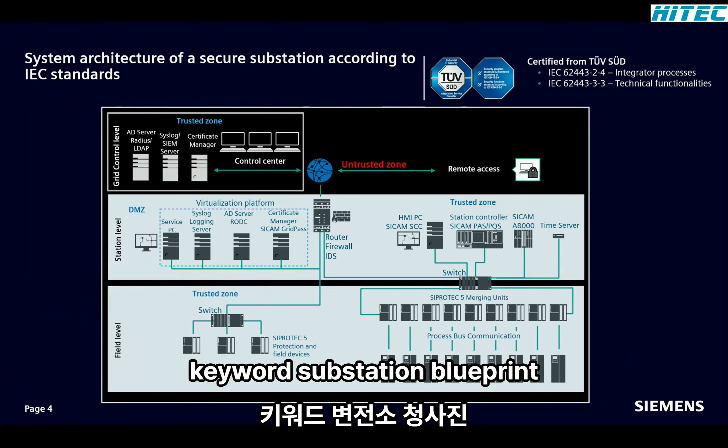From a cybersecurity point of view, SICAM A8000 remote terminal units are an integral part of a secure substation. Maybe you already heard about the secure substation blueprint. At Siemens, we focus on cybersecurity standard IEC 62443 as the security standard for any kind of automation and protection systems. Accordingly, we validated with TÜV Süd a best practice architecture for substation automation.

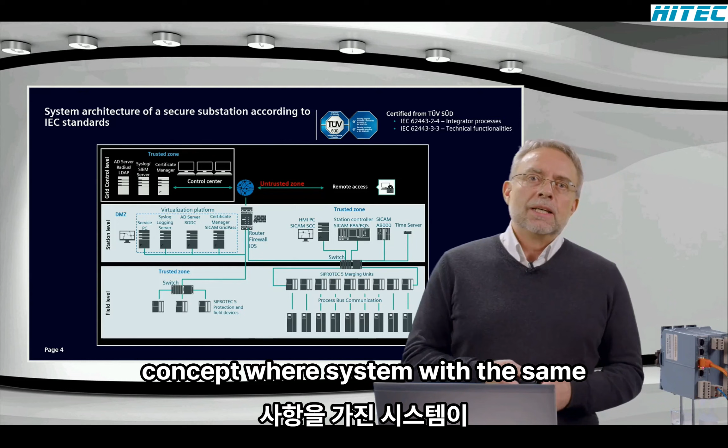This includes aspects such as network segmentation, access control, and account management, logging, and others. The architecture is based on a zoning concept where systems with the same security requirements are grouped into a so-called zone: the trusted zone with highest requirements for automation and protection functionality.

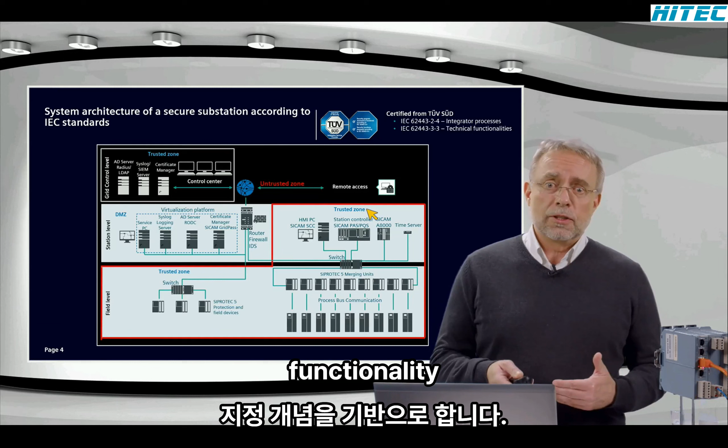Then the DMZ, demilitarized zone, for management functionalities. Here we have the service PC and servers such as syslog, domain controller, SICAM GridPass, our certificate manager. The untrusted zone is the communication network outside the substation. All inbound and outbound communication is controlled by a firewall with deep packet inspection and intrusion detection functionality.

The components and functions of a secure substation are: the SICAM SCC as a station control center and human-machine interface, in short HMI. Then we have SICAM PAS or PQS as power automation and power quality system. Then we have our SICAM A8000 as a modular device for telecontrol and automation applications.

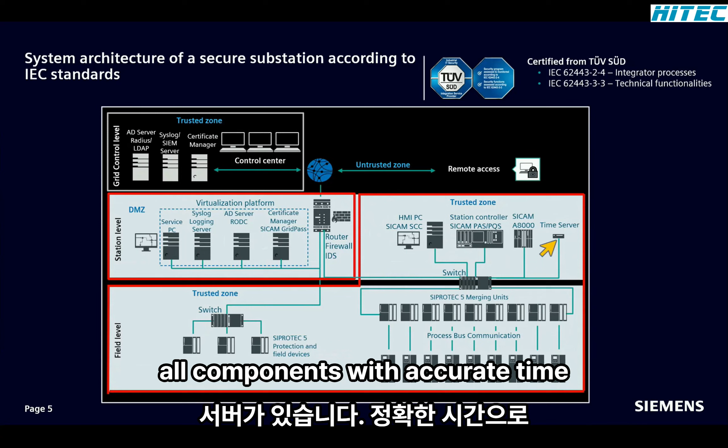Then we have our SIPROTEC 5 for protection, automation, and monitoring functions. Then we have our RuggedCom Ethernet switches for data transport within a zone, and an important time server to synchronize all components with accurate time signals. A service PC is used for substation automation, engineering, and management tasks.

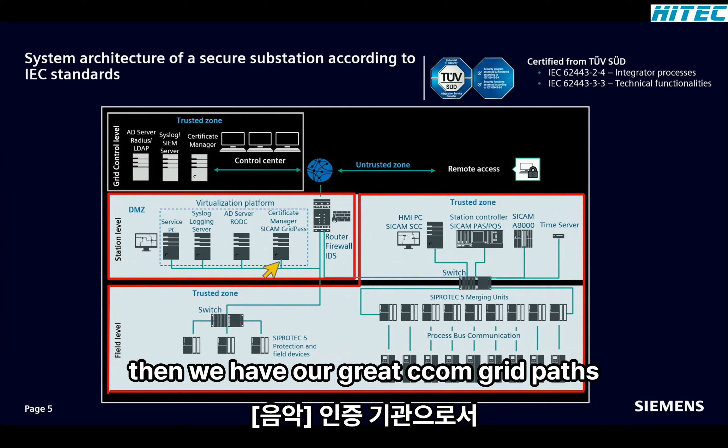Importantly, we have our syslog server for centralized logging of messages and alarms. Then we have an Active Directory server for domain user management. Then we have our great SICAM GridPass as certification authority or subordinate certification authority for certificate management. And then we have RuggedCom routers and firewalls with deep packet inspection and intrusion detection functionality.

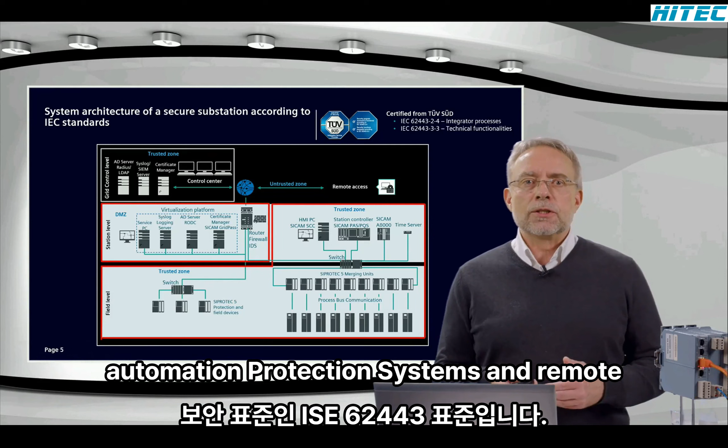Okay, from a cybersecurity point of view, remote terminal units and automation systems must be considered an integral part of a secure substation, as I mentioned already. At Siemens, we also focus on standards, and one of them is the IEC 62443 standard, the cybersecurity standard for any kind of automation, protection systems, and remote terminal units.

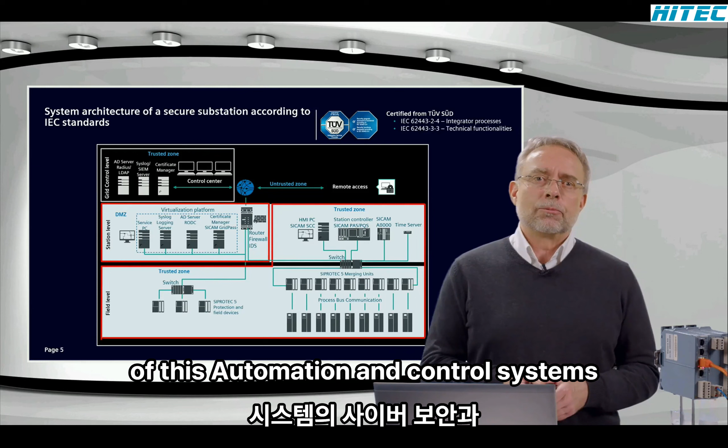According to these requirements, we validated with the TÜV a best practice architecture for substation automation. This includes aspects such as network segmentation, access control and account management, logging, and others. Today, I will cover some aspects that are specifically relevant for cybersecurity of these automation and control systems. In the end, the goal is to have measures to ensure the availability and integrity of the overall substation. That is why we will also learn for each feature the interaction with the devices.

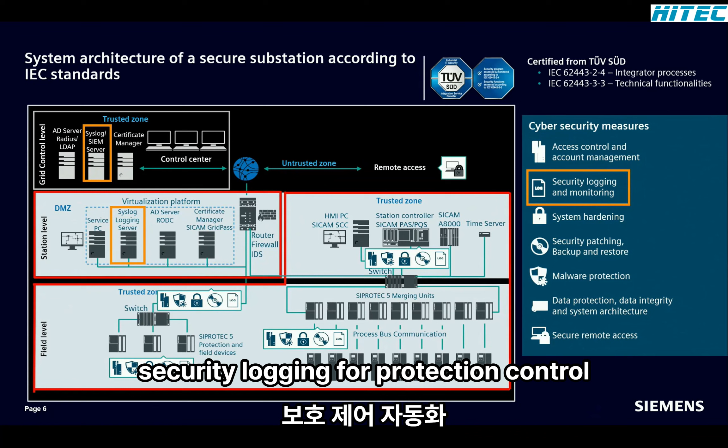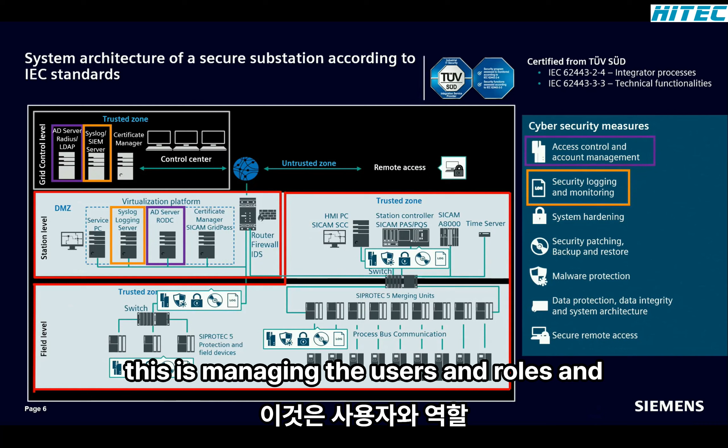So, security logging. Security logging for protection, control, automation devices, as well as communication systems will interact with the so-called syslog server and further, a security information and event management system. Then we have our access control. The remote terminal units will interact here with a so-called Active Directory, which manages the users, roles and passwords. Then we have our certificate manager. For authentication and secured communication, we need to create a so-called certificate with SICAM GridPass as a certificate manager.

Okay. Our SICAM or SIPROTEC systems have already integrated cybersecurity features. Some of these features, like firewall and software signatures, are inbuilt, but many have to be activated or filled in the system with interworking to other systems. As a first feature, our firmware is signed with a Siemens certificate, and this is a main protection feature against manipulation. Security logging needs to be enabled in the device, but it works together with a syslog server via the syslog protocol.

Role-based access control with central user management is also a feature which works in combination with an Active Directory domain controller. Secure protocols like TLS must also be seen in combination with other communication partners or server applications like SICAM GridPass providing certificates. Then we have firewall and VLAN applications where we can separate, permit, or restrict complete system traffic types. SICAM GridPass is a great piece of software which provides certificates according to standard X.509 to TLS-based applications within a complete customer network.

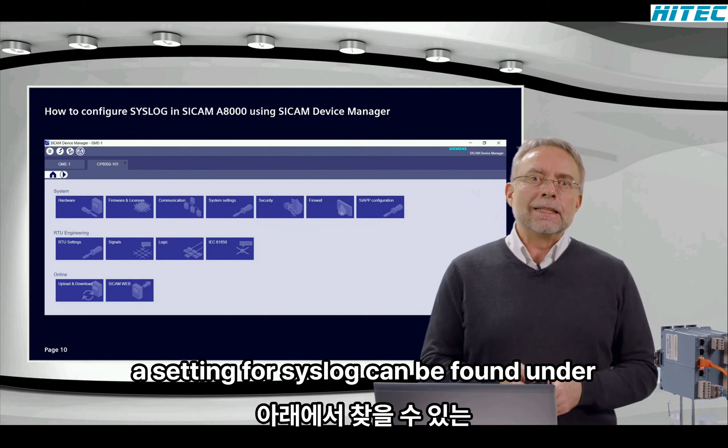So let's now look at how logging is easily activated with SICAM Device Manager. So here we enter the SICAM Device Manager. In the SICAM Device Manager dashboard, the setting for Syslog can be found under the Security button. Within Security, select Remote Security Logging to configure the Syslog client settings. Under Device, Name and Syslog prefix, select Yes to activate Syslog.

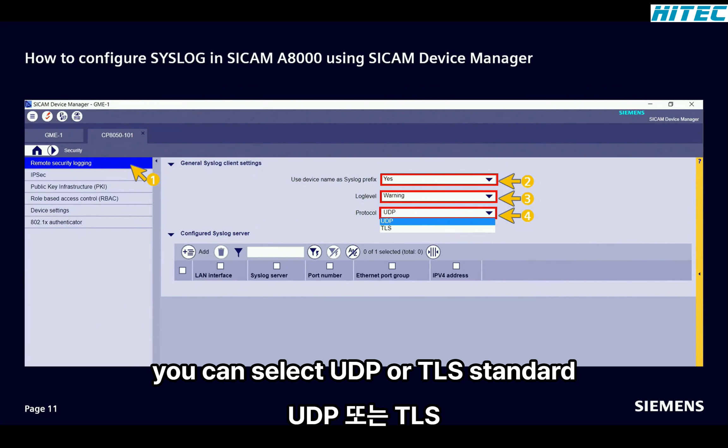Under Log Level, select your required minimum log level. The default setting here is warning, which means that warnings, alerts, and errors will be sent to a Syslog server. As protocol, you can select UDP or TLS. The standard setting here is UDP. TLS would be possible when a Syslog server supports the encryption of Syslog messages via TLS.

Under Configured Syslog Server, press the Add button to open the configuration parameters for Syslog servers. So input the settings to reach the Syslog servers, like UDP port 514, which is the Syslog default, and also the IP address and the LAN interface via which you reach the server. So now we save and we continue with the next slide. And then we can upload the configuration to the RTU.

And now we do a practical example with my colleague, François. Thank you very much. Yeah, thanks. Thanks, Georg. Thank you very much. Thank you. So I need to log in first to my PC. One moment, please.

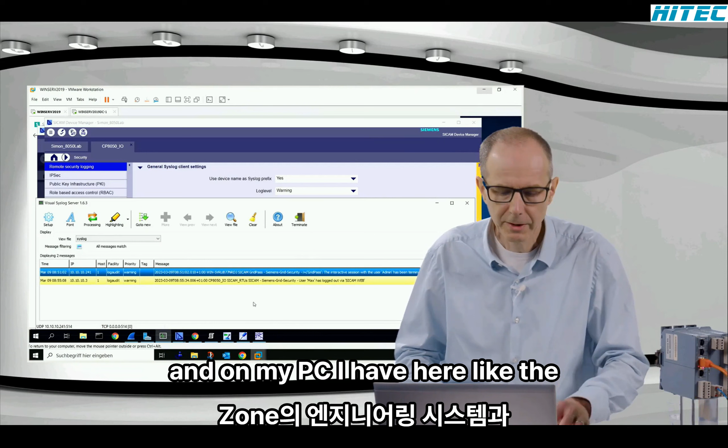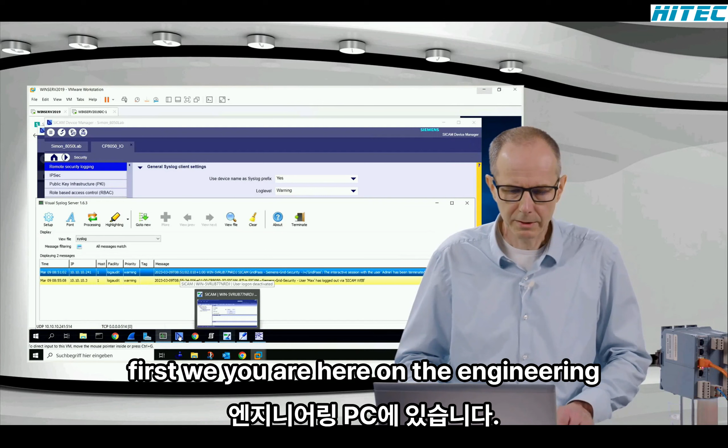And on my PC, I have the engineering system in Trusted Zone, and I'm connected to my SICAM RTU, the SICAM A8000. This model is the CP8050. It's a CPU with a power supply and some IOs. So first, we are on the engineering PC where we have our SICAM Device Manager as shown by Georg before.

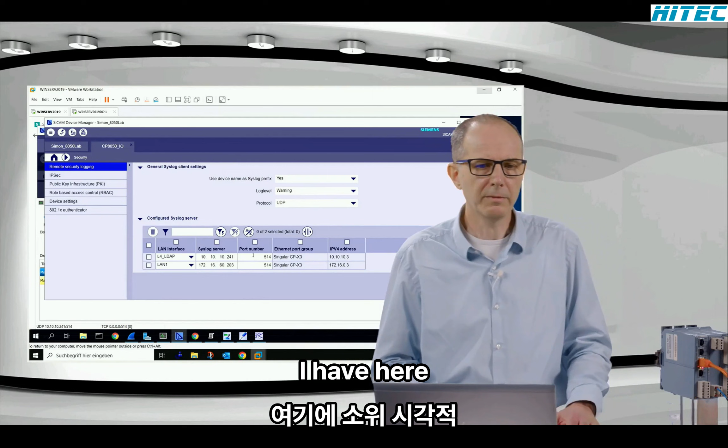The settings for syslog you will find under security, and under security the first one is remote security logging. We have already configured and loaded this to the device, to see the name of the device, to have the warnings and the alerts, and we do it via the protocol UDP. And on the same PC, on my IP241, I have a so-called visual syslog server that is running in the background, which we see here.

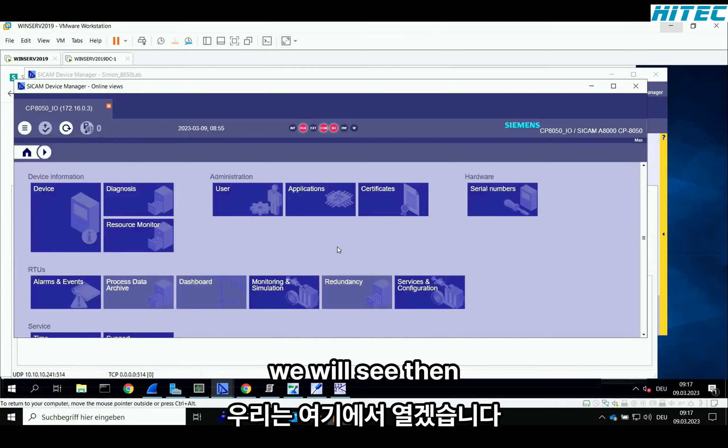So if now we log in with our SICAM Device Manager online view or the SICAM web, let me open this in parallel. Normally when I'm logging in with a user, for example, the user Max, it is already running with role-based access control, and Max has the maximum of permissions. And when I'm logged in with this user, then I will see, sorry, here, this entry, yes, exactly this one.

So the message is a warning, and with this warning, I see exactly the time of this webinar, which device, and that the remote user Max has logged in successfully with the SICAM web tool. We can also create some syslog messages when we are logging in, for example, with another user. First log off and log in again, for example with another user called engineering, Engi. So we will see that it works, and that again a user login is creating warnings.

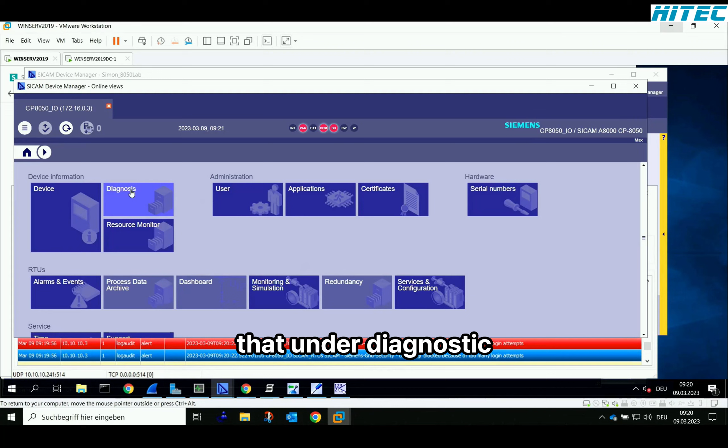What we also can see in the web UI, the SICAM web, is that under diagnostic you can also see the same syslog messages under security syslog, what is inside the device. You see that this device has also logged all these security messages. You have space for 8,000 log messages. Here's the last one we see, and you can scroll through them.

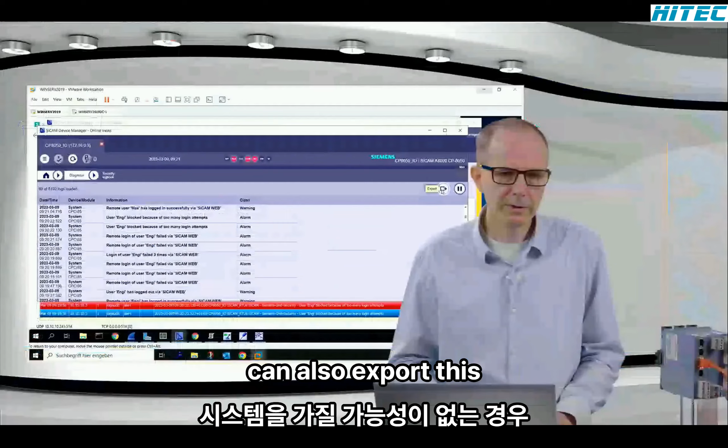This device already has 8,000 entries, and if you do not have the possibility to have a central syslog system, you can also export this information in a CSV file. And yes, so that was a short live overview of what kind of syslog messages this system sends over syslog, but also stores locally inside the device.

Okay, thanks a lot, François. Great presentation. Welcome. Thank you. Then let's move on.

So next slide, I come to the summary in just a minute.

Okay, here's a summary of syslog. The syslog is very simple to activate in our devices. It is also easy to test. Syslog is actually extremely important for cybersecurity in substations because in case of an attack, we can easily analyze quickly who, what, and when something was happening.

Typically, an attacker will work invisibly. Syslog is actually the protocol with which we can bring light to see what was happening. And this is the reason why it is highly recommended by IEC 62443. Syslog can also be encrypted via TLS, as recommended also by IEC 62351.

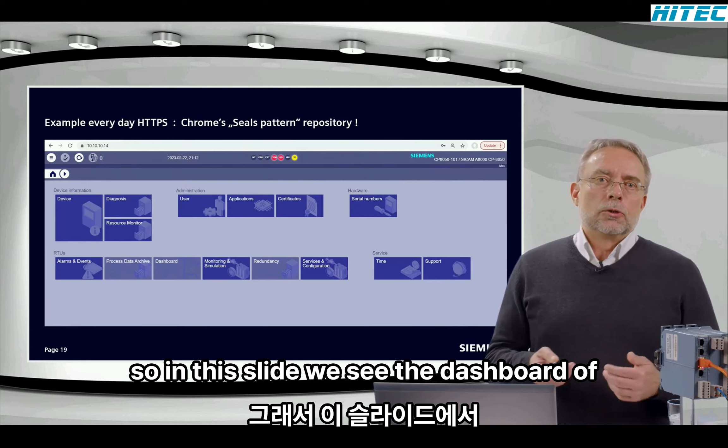So in this slide, we see the dashboard of our SICAM Web. And here, when we click on the browser URL, we can also check the SICAM A8000 certificate. It has a validity and the connection is secure. When we click on the certificate, we can display it, the issuer, and again the validity.

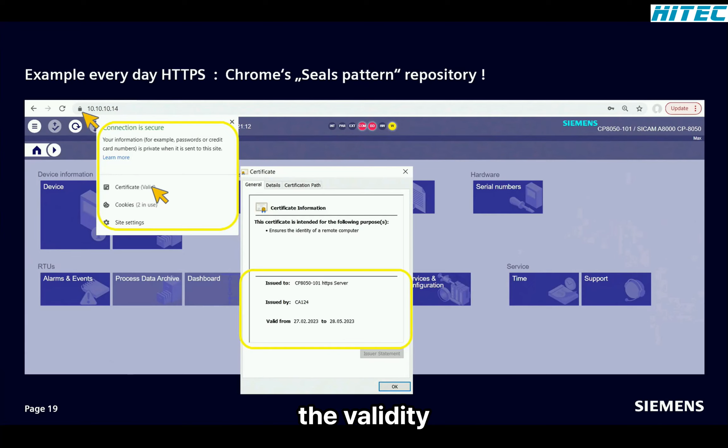So what can we do now with certificates in TLS for utility networks? And this is really a lot. A lot of TLS applications are possible with SICAM A8000 with certificates from SICAM GridPass. This webinar is for SICAM A8000, but we can do similar applications in SIPROTEC 5. Automatic certificate enrollment via secure transport: this is the EST protocol, and to thousands of A8000 devices we can transport certificates.

Secure access to SICAM A8000 via web browser is possible. Secure access to SICAM A8000 via SICAM Device Manager. Secure remote access to authenticate an engineer on site to a domain service and access the network. Secure transport of syslog messages. Secure IEC 61850 MMS data transport between SICAM A8000 and SIPROTEC 5. Secure IEC 61850 MMS or also IEC 104 or DNP3i data transport between SICAM A8000 and SICAM PAS to a control center.

I do not want to spill water on the boxes. Better not. Or just throw something down.

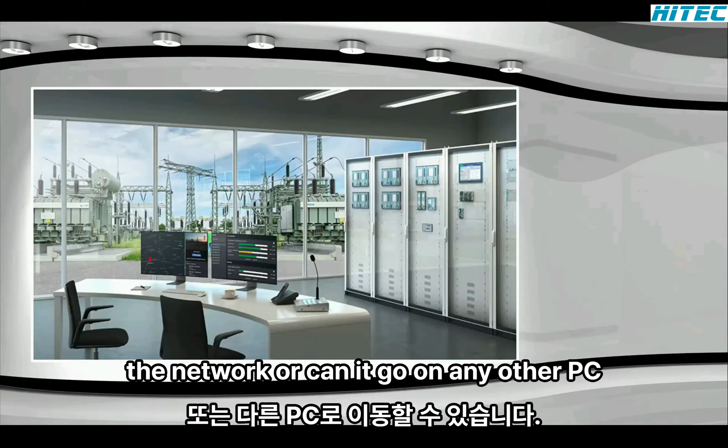No. Yeah. And the next question came in from CB. Where do I have to install the GridPass software? Do I need an extra server PC in the network, or can it go on any other PC? Yes, I mean, GridPass is actually quite a small software package. It is not too big.

You can install it on a server, a Windows Server 2019, and you can also operate it in a virtual machine. This means you do not spend the money for extra server hardware. You can run it in a virtual machine where you have an existing server. So this is what we're actually doing with our PCs also. Here, in our training labs, everything is running on a virtual machine on the basis of Windows 2019, and then you can operate it.

Okay, yeah. So I do not necessarily need extra server PC hardware, but I definitely need a server to run the software, right? Right. You need the software with Windows Server 2019 or later. Yeah, fully understood. And ST wants to know, the questions continue: Do DIGSI or SICAM PQS have support for the syslog monitoring of user activities?

Yes, you have some syslog messages, but DIGSI is running on a Windows PC, so these messages are in the Windows event message log system. So it's inside your Windows event log. Oh, okay. And these events from your Windows log, you can also send them, for example, NXLog can collect this information from your Windows event log. Collect the information and put it into a different place, like a copy then, right?

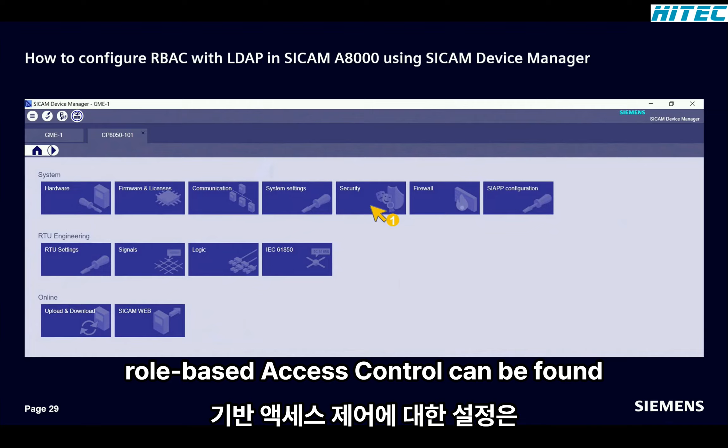Now let's start with the first step in the configuration, and therefore we enter into the SICAM Device Manager. So, slide number 29, we are here. The settings for role-based access control can be found under the Security button.

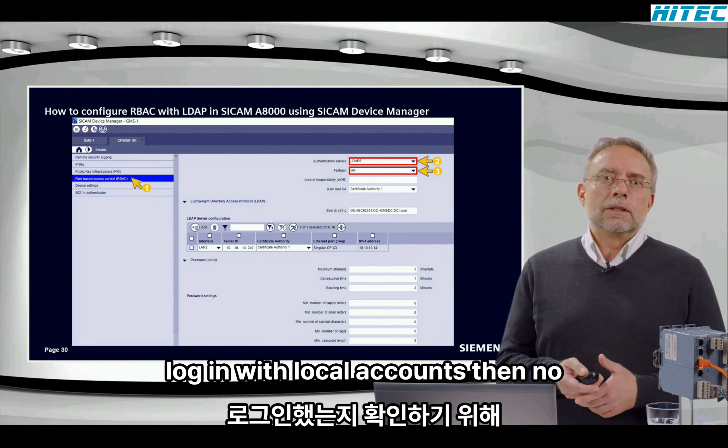Within the Security tab, we configure role-based access control. So we select role-based access control, RBAC, to get authentication service. Then we select LDAP-S as role-based access control. Then we select yes to ensure that you log in with local accounts when no Active Directory is available.

This is very important. Here we have to select a placeholder for the root certification authority. In our case, it will be Certificate Authority 1. Now we have to insert here a string of this Active Directory organizational units where the LDAP users are located. And now let's move to this location.

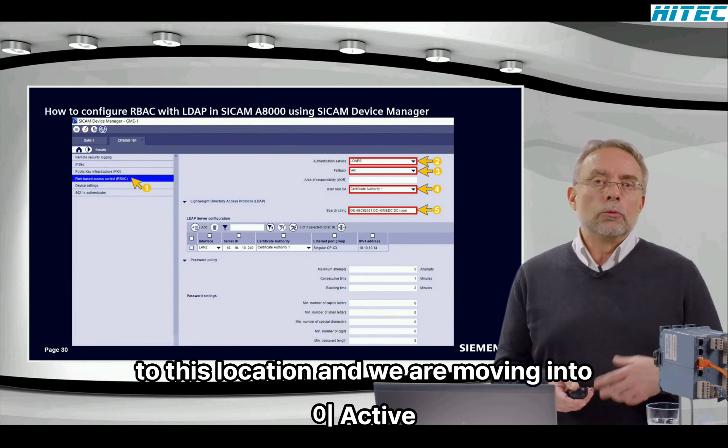So now we are back in SICAM Device Manager, and now we insert the copied string here in the settings, in the search string. Under LDAP server configuration, click on Add button to open the device configuration. The possible redundant LDAP servers can be added here if necessary.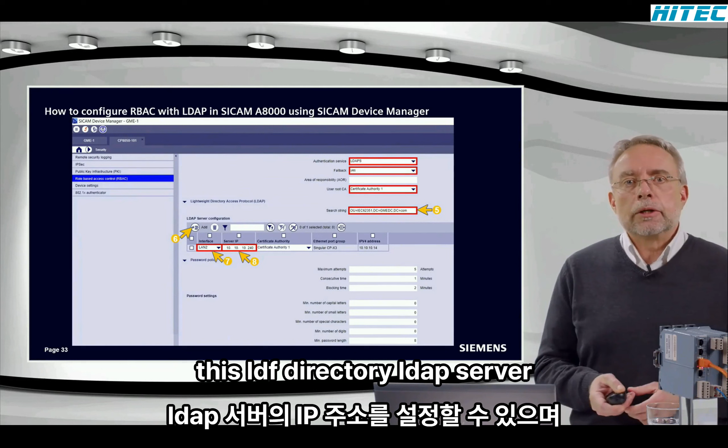So we can select now a LAN interface to reach the Active Directory. Here we can also set the IP address of this Active Directory LDAP server. And now we can select here our certificate authority.

And now we can also set here a password policy. That means the maximum attempts, consecutive time, blocking time, and so on. And you can set your password settings, let's say lengths, etc. And now we save the configuration.

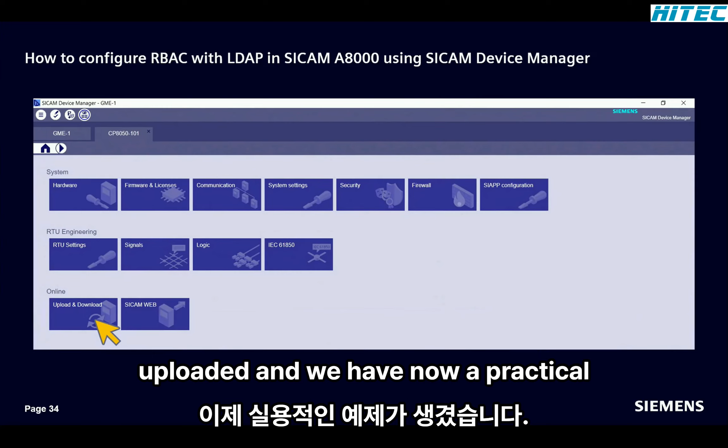So, in the main dashboard, the configuration to SICAM A8000. And now we have saved, and now we are uploaded. And we have now a practical example. This means we are finished.

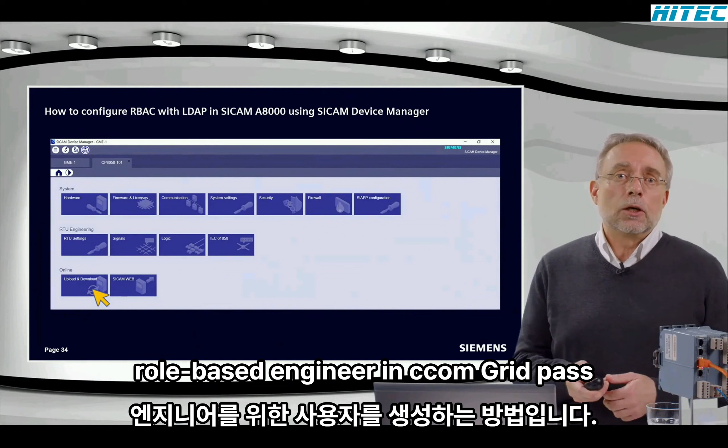And how to create now the user for role-based engineer in SICAM GridPass. This is the second step. Let's move to our certificate manager, SICAM GridPass. In the main dashboard of SICAM GridPass, we select certificates.

And now it opens the next screen. In the certificates tab, click here this Add Certificate button. Under point 1, select certificate profile. Select here certificate without extended key usage.

Then we go to the next step. Under point 2, define a certificate settings. Click here the issuing certification authority, in our case CA124. Insert here common name, engineer 01. And here you can select the country code, and let's input the remaining settings by default, and we click here next.

So in the next setup point, assign roles and area of responsibility. This is now something important. We stay here for a moment because you can see here a lot of roles, and these roles are actually according to the IEC 62351 standard, predefined in SICAM GridPass.

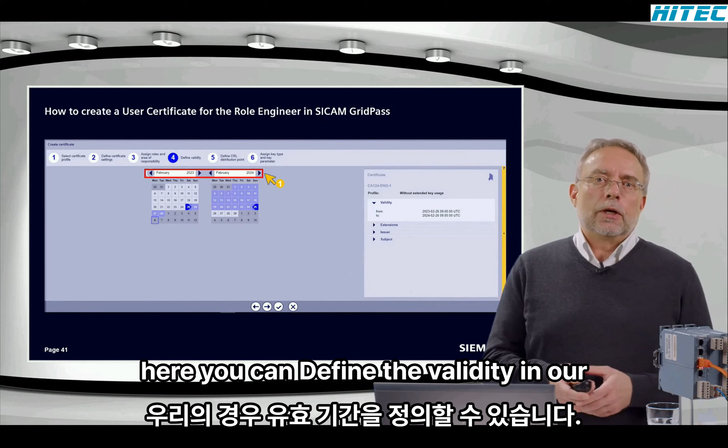Here you can define the validity. In our case, we have here 1 year, and this is okay for this example, for this client certificate. And now we go to the next step.

Okay, we are now here under point define CRL, certificate revocation list point. And here we set automatic. And then we press the plus button here, and then the brackets appear also in selected item fields. And then we move to the next setting.

And here under point 6, the assign key type and key parameters, you can set different keys, and you can select here ECC or RSA. Here in our example, we use RSA. Also you can set here different key parameters, let's say 1024, 2048, 4096, and so on. These are possible, but 2048 is fine. And we press here OK. And then actually the certificate is ready, is created.

Then we move to the next slide, and this is here under certificates. We can now download the created certificate. What we do? Select the certificate. Now we press the export certificate button. In our case now, we have to select the certificate as a DER file. And now we can export the certificate, and the certificate is downloaded and can now be found in the download directory of our Windows File Explorer.

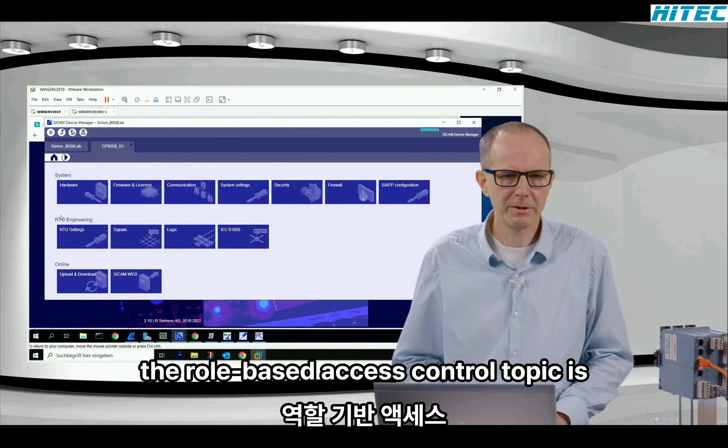So yes, as explained in the slide, the role-based access control topic is, we can find it under security. Under security, I already have here to select the role-based access control.

And here already, authentication service is LDAP-S, but Radius is also possible, for example. But here we are on LDAP-S. And as explained, we also have to set the fallback to yes, because if we do not do that, then we have problems with our LDAP server. We are not able to connect to our device.

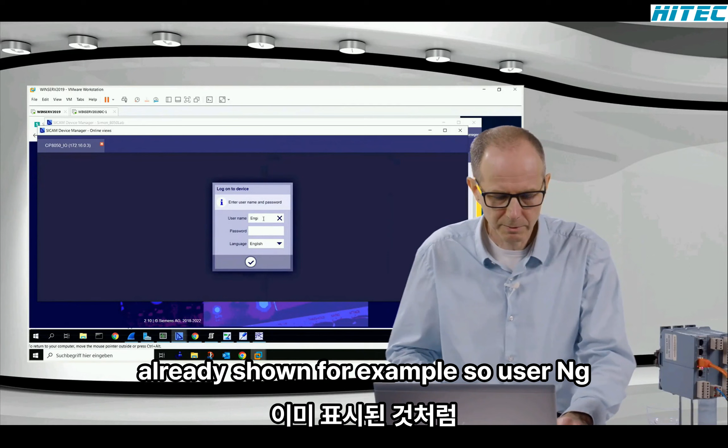And as explained, you have the user root CA, and here it's more or less the placeholder that you have in your device. So before, via the web UI, you have put here under this placeholder under the root CA, so that we can see if you go into our device via the SICAM web and connect here, like already shown, for example, the user ng that already has been configured with a role engineer.

I can navigate as engineering. I can see settings for cybersecurity, so I can look what is inside my certificate. For example, here in my device, under certificate authority, the placeholder 3 is this CA124, what is used when I receive a user certificate, but also when the LDAP-S communication is established.

So that I have created in my GridPass and loaded here to my SICAM A8000. So that was for this setting. And I also have to copy paste or write in this search string.

So remember, this search string is, in my example, I have here my LDAP server, my Active Directory server. This is here on the second virtual machine, here on the server 2019. I have to log in to this one, and there you can see.

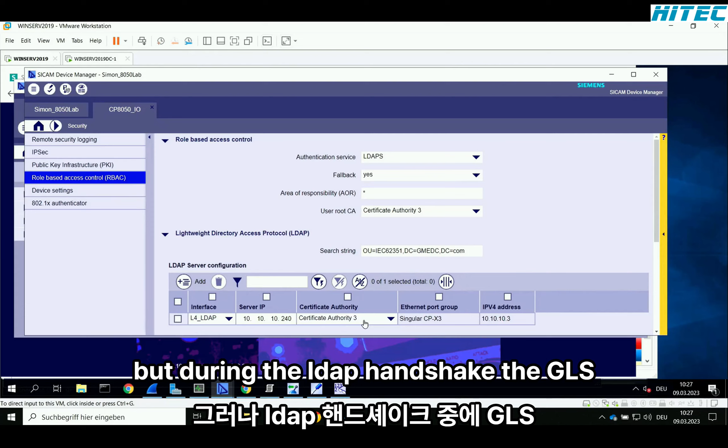And I have one LDAP server that I have added here, and the IP address of this Windows server domain controller here 240 have to set here, and during the LDAP handshake, the TLS handshake, I will check that on my domain controller, the LDAP server sends a certificate that was signed with this CA.

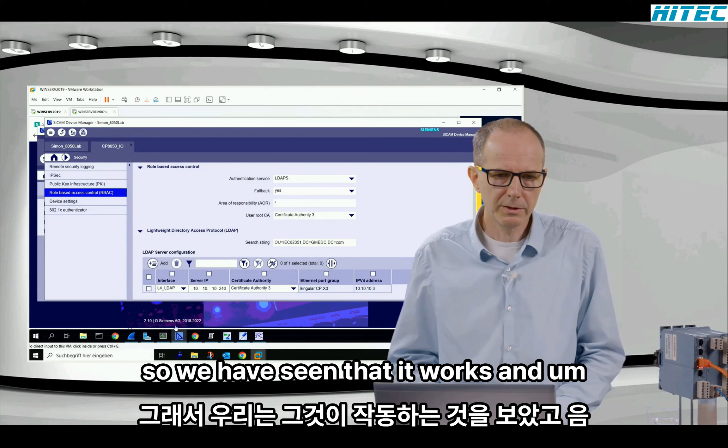Okay, so that was loaded onto the device. So we have seen that it works, and we will show again how to create a user with SICAM GridPass.

Please here, okay, here my SICAM GridPass is running, and now I will create a certificate, a user certificate for a user. As explained before, I have to click on Add Certificate and select here the type.

The type is so-called without extended key usages. And then I will be guided automatically. The issuer, what I need, is already selected, if you have done that before.

And for example, let us create a user certificate for a role security administrator, and only enter here this name. And now here, remember the important part.

You see no area of responsibility is set here under subject. So I can select the corresponding role as it is recommended in the IEC 62351-8. And for example, let us use a security administrator.

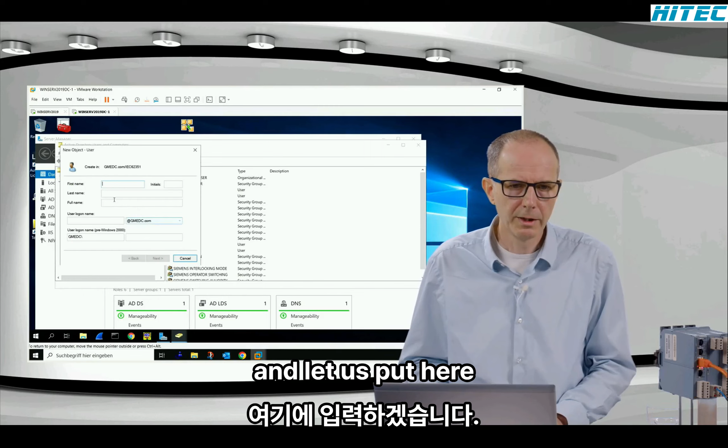This is either like that on this level. You select here new, go to user, and let us put here the SecAdmin2 as for example, and put it here also the logon name.

And in the next step, you have to enter the password for this user, so centrally, not for each device, inside each device, one time centrally here. And click on next, and now this is created.

So SecAD2 is created, but remember, now I have to attribute to them here the certificate, what you can do with here, add from file.

And here, for example, in your settings, okay, here it's a role, user role, security administrator, what you have copy paste from your SICAM GridPass, and apply.

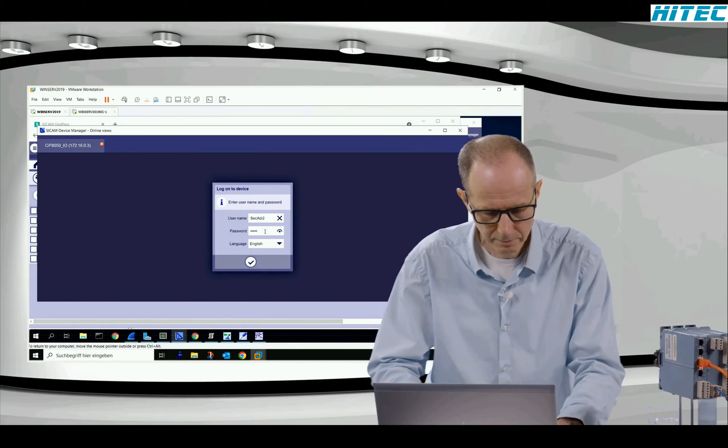The name SecAD2, with the password what is centrally managed in the domain controller. Right. Hope I do not make a mistake in my password, but normally, no, I can log in as security administrator, a new role that we have.

So, for example, under user, you can see the local user, but also here, the logged in user. I'm here, SecAd2 as username, and my role is written there. So, for example, with this role, I have not all the permissions.

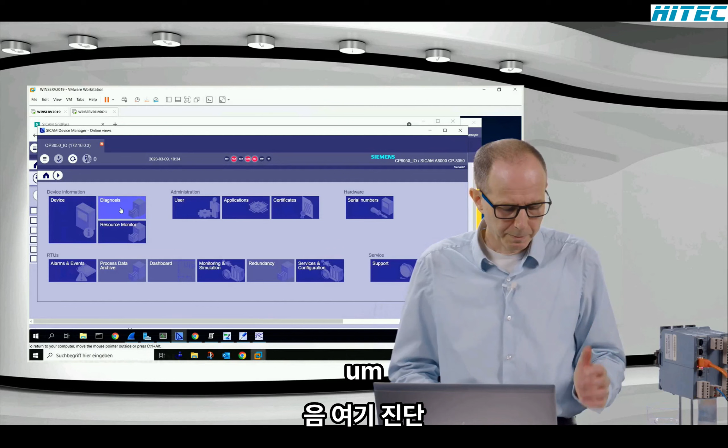For example, here, I'm not able to clear diagnostic logs.

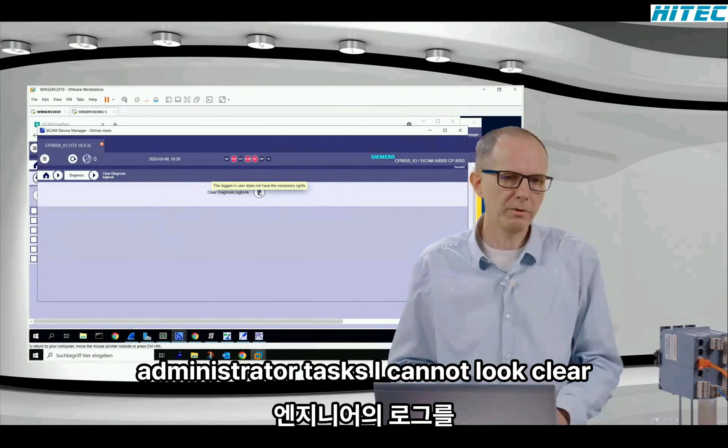So this is not possible. I do not have the permission to do that as a user who has only permission to do security administrator tasks. I cannot clear the log for the engineers. Okay. That was role-based access control in a practical way.

Okay, thanks a lot, François. Great presentation. So let's move on to the summary. Just a moment. Okay, just a moment. We are coming to page number 52, right?

Here, a summary of role-based access control with LDAP. Actually, it is possible to configure a redundant LDAP server in our SICAM A8000. Role-based access control with LDAP is a standard also for cybersecurity for substation and automation systems. So attacker access is blocked after a certain number of unsuccessful login attempts.

High availability. We have seen that fallback measures, let's say also backup servers and local users, are possible. That is why it is also recommended by IEC 62443, and IEC 62351-8 defines the protocol LDAP and the roles to improve interoperability. This means we are interoperable with other systems like Windows.

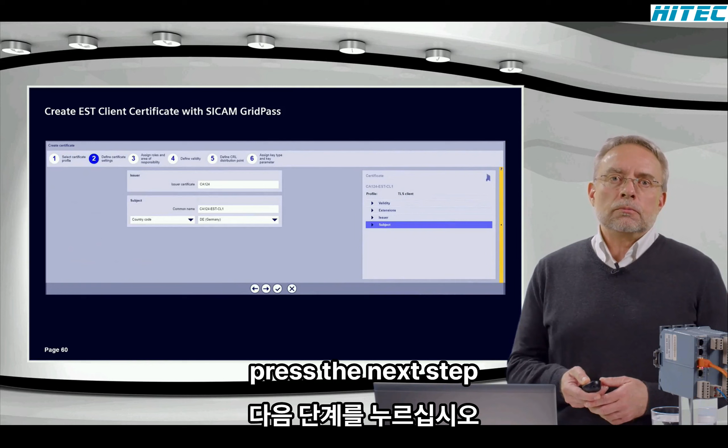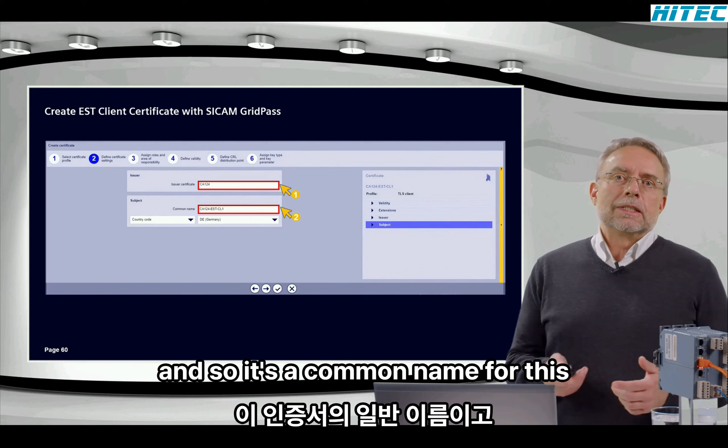This certificate will actually be used as an EST client certificate. Press the next step. Then under point 2, define certificate settings. We have to insert the issuer name, which is the certification authority name, in our case CA124. Insert the common name for this certificate, select the country code and leave the remaining settings as default, and then we click the next step. This slide can be left with the default settings.

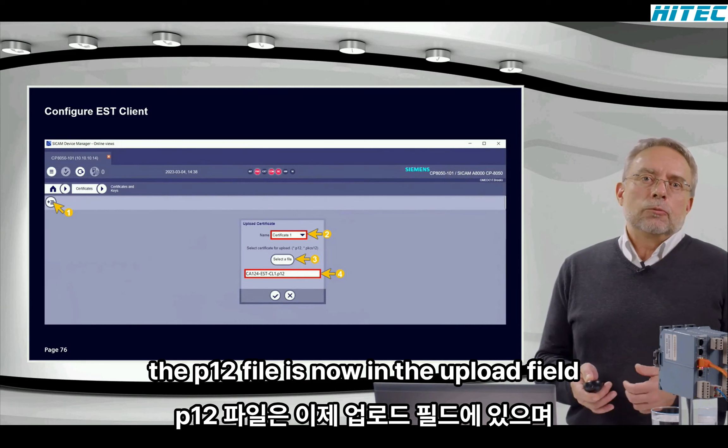The P12 file is now in the upload field, and click the OK button to load the file. Under Certificates and Keys, we can find the certificate file now. When we open the certificate, we can find more details.

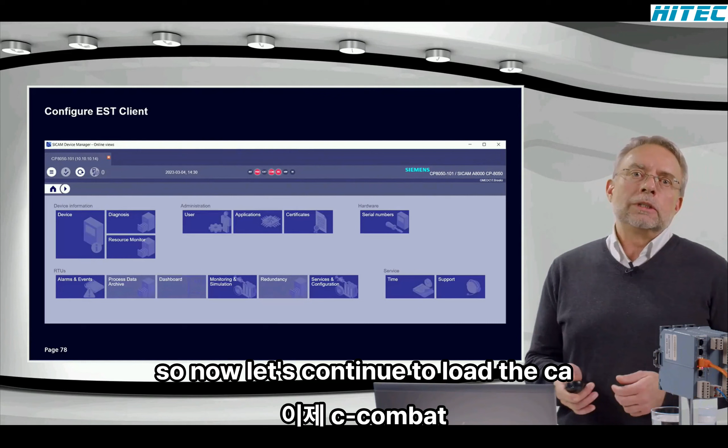So now let's continue to load the CA root certificate. In SICAM Web Dashboard, click the button Certificates. Click to load the CA root certificate to button Certificate Authorities. Then click the Add button to upload the certificate.

And now a field appears. And here we can select authority, certificate authority number 1. This is again just a placeholder to load this certificate. Click to select a file, and then an Explorer field opens from where you can select and open the CA PEM file. So then the PEM file is now in the upload field, and then we can click to open the file and load the file.

So under Certificate Authorities, we can now find this root certificate. And when we open the certificate, we can find more details on the CA root certificate. So let us pause for a moment. And now we are loading the certificates, and this is now finished.

And now we can continue with the configuration of EST in SICAM A8000 to receive now the MMS server certificate in SICAM Device Manager. So to do this, we come to SICAM Device Manager dashboard and we select Security. We actually configure here the EST server from which we receive certificates automatically.

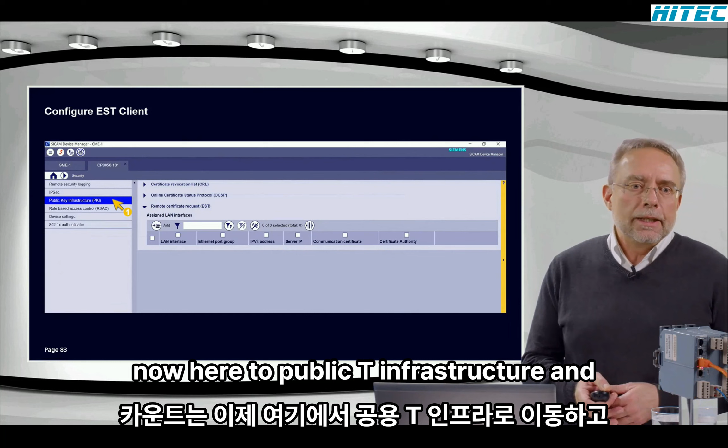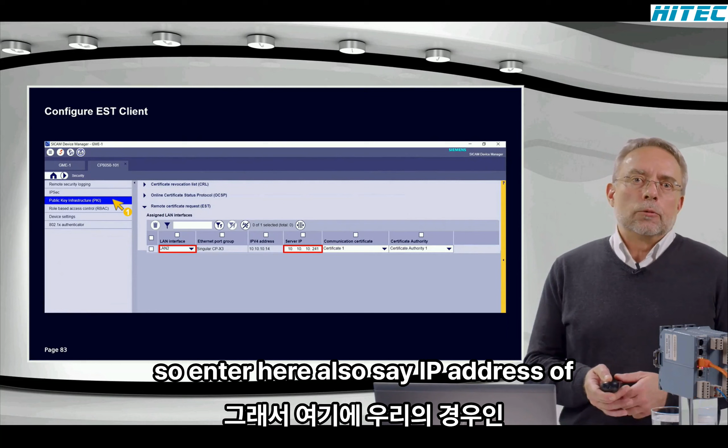So go now here to Public Key Infrastructure and open Remote Certificate Request. Then we press here this Add button, and the LAN interface is open now here. So enter here now in this field the LAN interface for the communication network. So enter here also the IP address of this EST server, which is in our case also SICAM GridPass.

Now we select here the placeholder, which is Certificate 1, where we have loaded this P12 file, and for this certificate file, this PEM file. So, and next, go on with the server services. And we are going back to the dashboard.

So go back to the SICAM Device Manager main dashboard and further to communication to the server devices. We select here communication in the main dashboard. Here, click Server Services. So ensure also that this standard parameters field is now activated. And here, under HTTPS certificate, select now EST.

Under assigned LAN interfaces, press now this Add button. And here again, the LAN interface for communication to the network appears and is selected. So here now in the field HTTP or HTTPS, select HTTPS for secure communication. And now finally we can save the configuration.

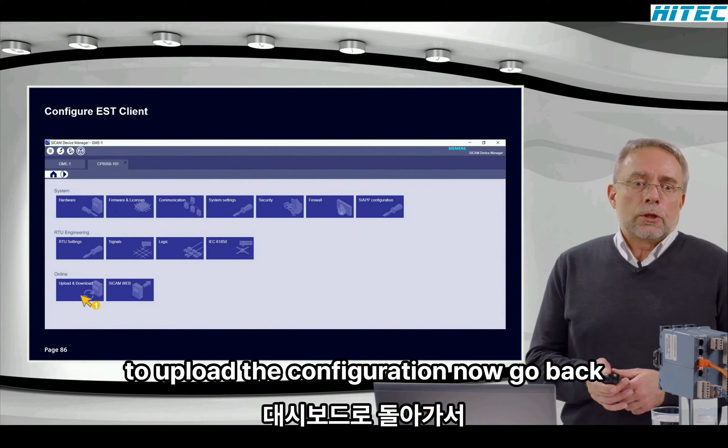So to upload the configuration now, go back to the dashboard and upload this configuration. And after restart of the RTU, we check in SICAM Web the requested EST certificates. So now we are going back to SICAM Web. Continue slide 88. So in SICAM Web dashboard, we can click the certificates button. To see the server certificate, go to requested EST certificates.

So in SICAM Web, we can now see the certificate for the server. This is number 1, which was provided now automatically via EST. And also we have received a new EST client certificate. Now let's go back to our overview to see the practical part, the next step. After step 2, we can now continue with step number 3.

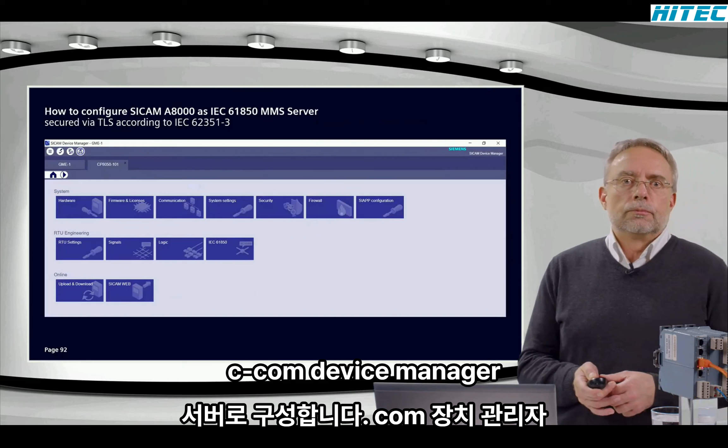And here we configure SICAM A8000 as IEC 61850 server for the MMS connection according to IEC 62351. So let's go to SICAM Device Manager. In the dashboard of SICAM Device Manager, select RTU settings. In the dashboard of CP8050-101 RTU settings, click to open CP8050-101 and Central Processing M.

And under Protocol 1, select IEC 62351-3-4. Select now here server encryption as encrypted. Select in the next field server MMS certificate and here insert EST. Select in CA server EST as well. And also in server CA EST.

So, and now this MMS server setting is finished and we can continue to upload the configuration to the RTU. We do this from the dashboard and upload the configuration. And now we are ready with the SICAM A8000 configuration and continue now with SICAM PAS.

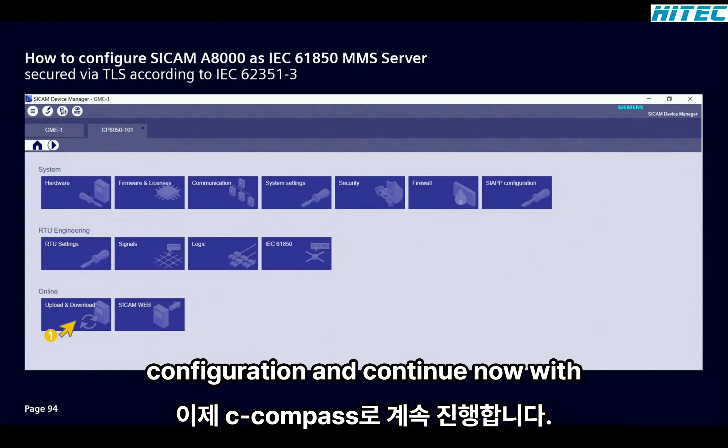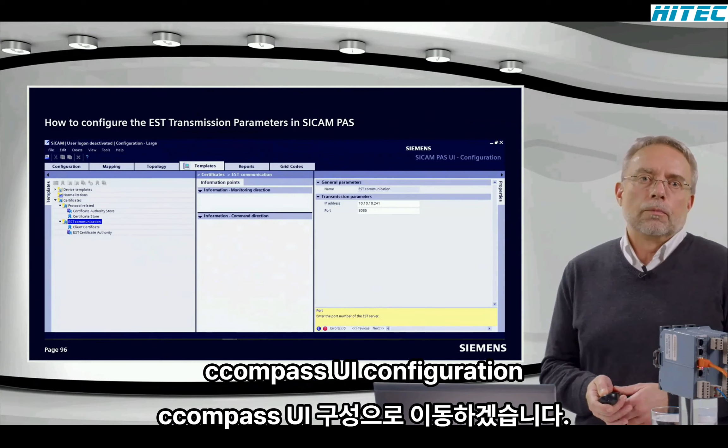So coming back to our practical example, we now configure SICAM PAS with CA root certificate and EST client certificate to receive MMS client certificate automatically via EST. So let's go to SICAM PAS UI configuration. To configure EST transmission parameters in SICAM PAS, go to SICAM PAS UI and configuration under templates.

So click on EST communication. In transmission parameters, insert the IP address of the SICAM GridPass EST server and the port 8085 for EST. This port was chosen by the GridPass admin at the installation of GridPass. So let's continue to load the certificate, the EST client certificate.

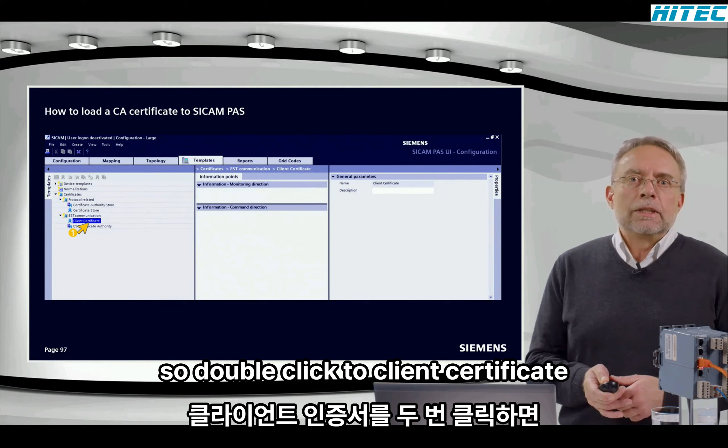So double click on client certificate and the certificate manager window appears. Click the add button here and the file explorer appears. Click on the selected EST client certificate. Click open. The certificate is now in the certificate manager, and we actually use the same client certificate which was previously used also for SICAM A8000, but it does not matter because we automatically get sent a new one. And now we click confirm, and now the certificate is loaded.

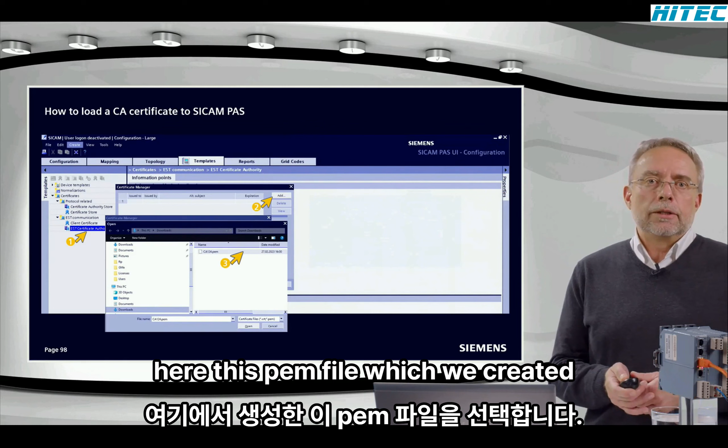So let's now also load the CA root certificate. We click on load CA root certificate. We do a double click. The certificate manager opens. We click here again the add button. The file explorer opens, and we select this PEM file which we created. We click open, and now we can see the file in the certificate manager. We click confirm, and we load the certificate. Now we can configure EST for SICAM PAS.

So here we presume that the SICAM A8000 IID file for RTU 61850 server 1 was already loaded. To configure TLS encryption in SICAM PAS UI, go to the configuration tab. We follow the tree down to the IEC 61850 client interface, and now we open the security TLS encryption field.

Under activate TLS encryption, you can select TLS using EST or TLS and A-profile using EST communication. For SICAM A8000, we select TLS and A-profile using EST communication. Then we also select the key algorithm, which is RSA 2048, which was used to create the certificates. With these settings, you are prepared in SICAM PAS to send a certificate signing request via EST to the PKI SICAM GridPass. And now you are ready with loading the certificates and the EST configuration, and you can move to the next step.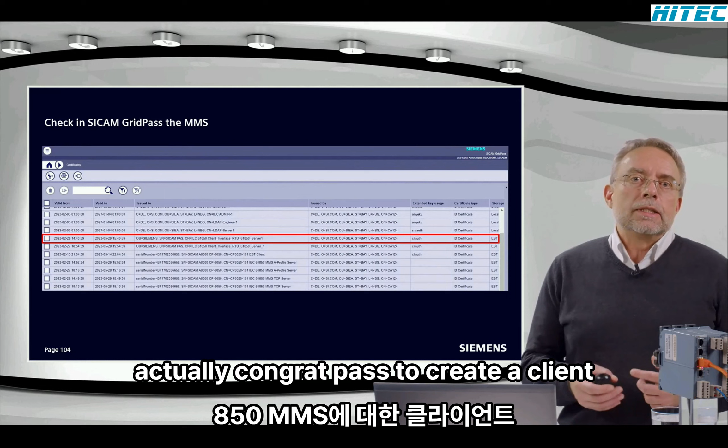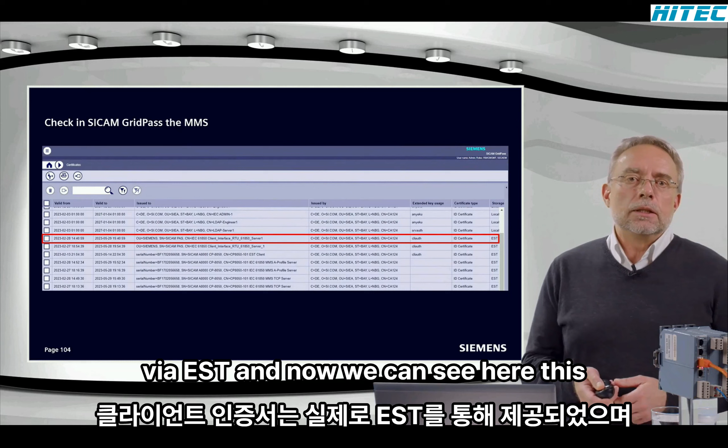So going back to our practical example, we now can check the certificates and the connection. For automatic creation of EST certificates, we have to go to SICAM GridPass. SICAM PAS asks SICAM GridPass to create a client certificate for IEC 61850 MMS, and the client certificate was provided via EST. Now we can see this created certificate here. SICAM A8000 also asks SICAM GridPass to create an IEC 61850 MMS server certificate, and this was also provided by EST. This can also be seen now.

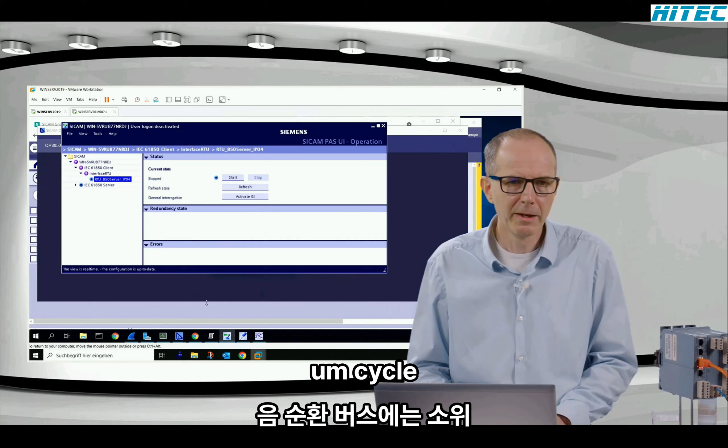Oh, yes. So let us see that all this theory is also working. Okay, so now I'm back to my engineering PC, and on this server I also have a SICAM PAS system installed, and this will be connected to our SICAM RTU. And for that, if you are using SICAM PAS, you have a so-called UI operation.

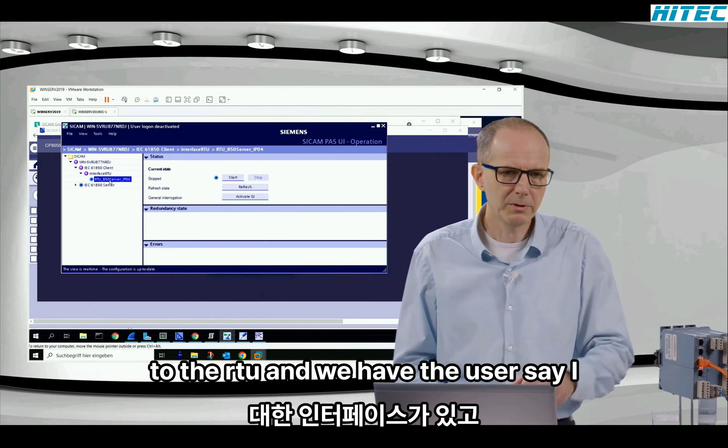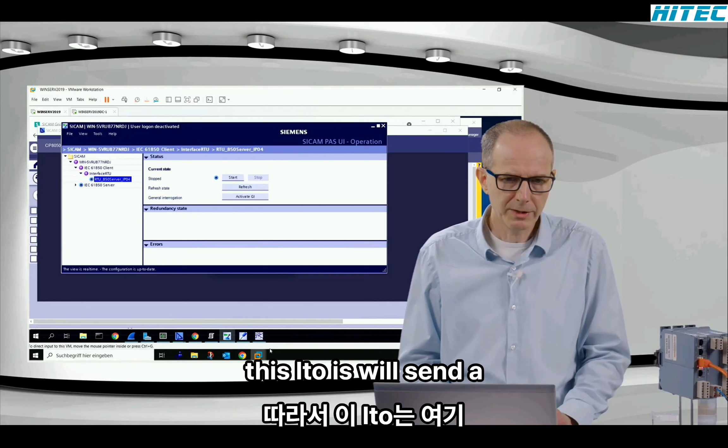And here we have already configured SICAM PAS as an IEC 61850 client. Under this client, we have an interface to the RTU, and we have the RTU, the SICAM CP-8050, as a server. In the background, we have configured the systems with a certificate. So this RTU will send a toggle message, which I can see here under my SICAM PAS value viewer.

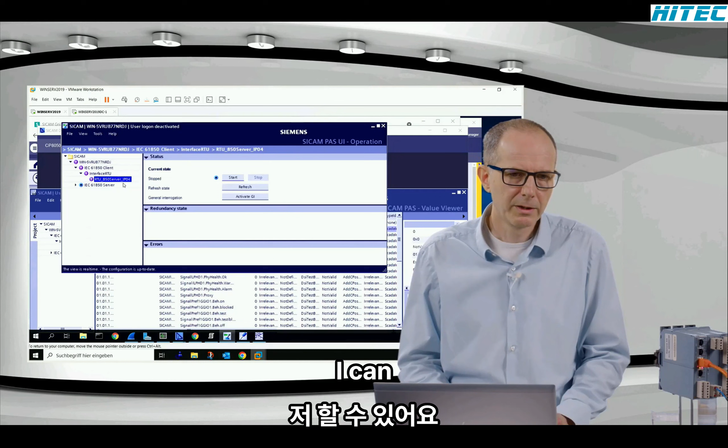And now if I start this connection, I can see that the message sent from my RTU coming via 61850 is received in my device. And if now a hacker wants to see this information between both systems, and if he uses, for example, Wireshark, he can start Wireshark, but he only sees this toggle information. It comes every second.

But if you now look inside this information, he only sees that it's TLS, it's encrypted, and the application data, he cannot see anything here. The message that is sent every second is not really readable, what kind of information it is. And that is the magic behind TLS. So we have secured this with a certificate for the client and the server,

and that we have done via EST. And only to see again how it was set from the CP8050 side, we have this so-called setting for EST, where we have created and assigned the certificate that we create in SICAM GridPass, and the CA and the certificate are set here. And really, the device has sent a certificate signing request to our SICAM GridPass, and SICAM GridPass sent back the two certificates for the EST secure MMS communication.

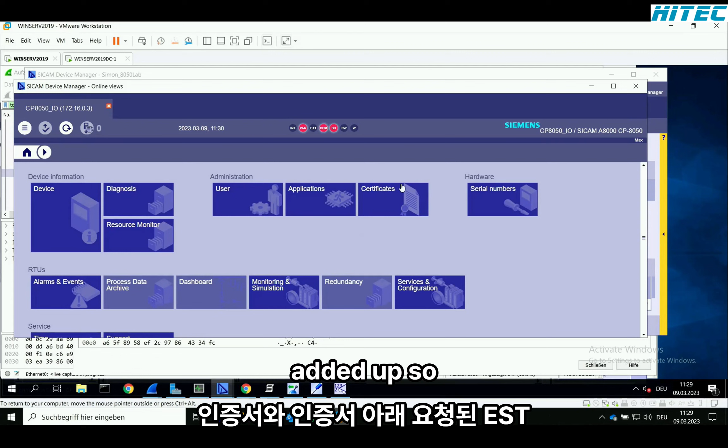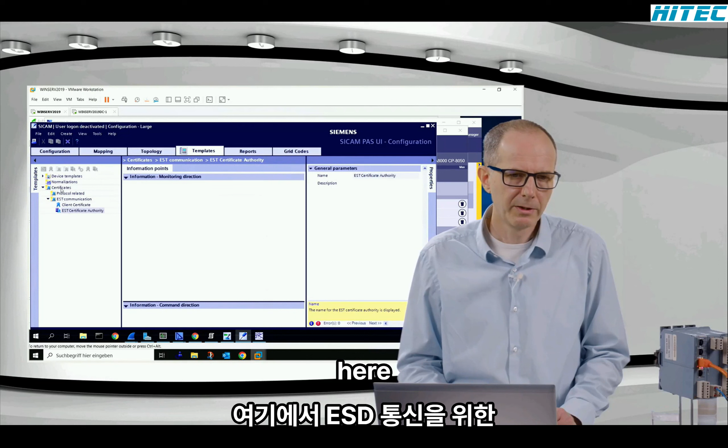And on SICAM PAS, we also have our UI configuration where we can check again what we have under templates. Here we configure the place where we put the certificates for the EST communication. It's under this structure, the EST communication is established with SICAM GridPass, and we have to put here the certificates that have been created for the EST communication.

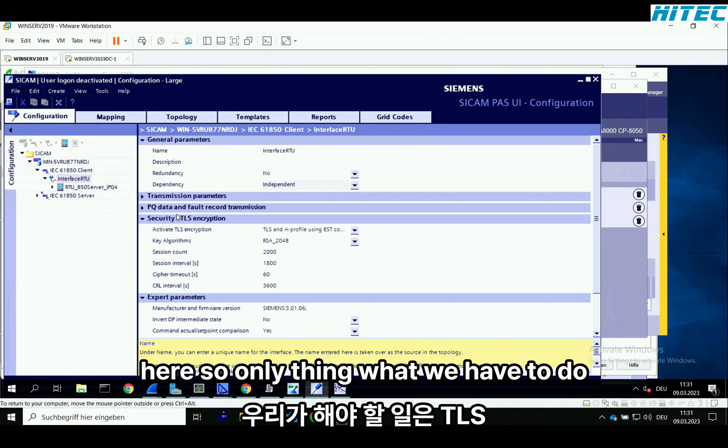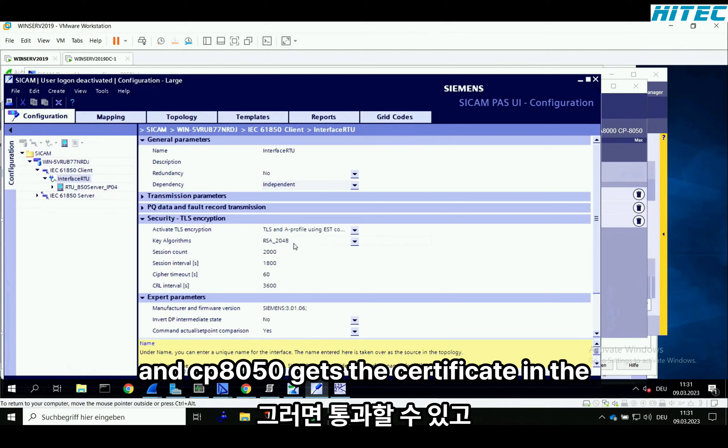And both certificates will be used in the background and in configuration when we set the IEC 61850 client. Here, the only thing we have to do when the client and server communicate is to set, under activate TLS encryption, TLS and A-profile using EST, and the key algorithm. And that's all. And then SICAM PAS and CP8050 get the certificate in the background via EST. And then your system is running.

Okay, thanks a lot, François. Great. Thank you very much. Welcome. Okay, let's summarize some points we have seen. Just a moment. Can I have the slides? The next slide. Just a moment. Yeah. Okay. Good. Now we are back in the summary.

Actually, what we have seen is the configuration is menu-driven, in SICAM Device Manager, in SICAM GridPass, and in SICAM PAS, and this is relatively straightforward. This is not a complicated command line setting. We have seen EST working for SICAM A8000 and SICAM PAS, providing client and server certificates for secure 61850 MMS communication. So the communication is also encrypted via TLS.

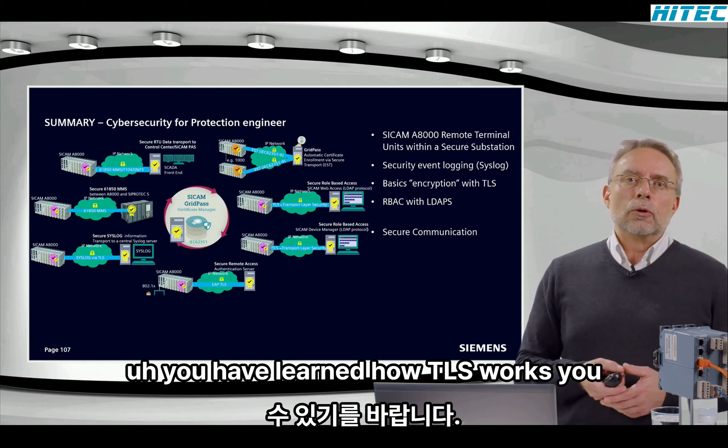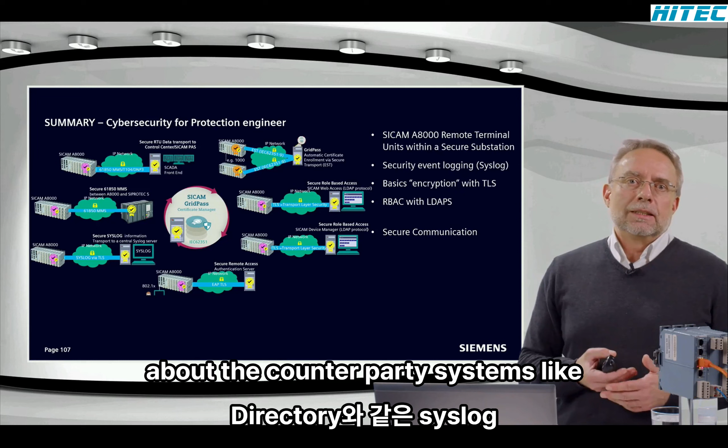So in summary, I hope we could give you a good idea about syslog, role-based access, and secure communication, and how straightforward it was to configure SICAM A8000, SICAM Device Manager, and SICAM GridPass. You have learned how TLS works. You have an understanding of what needs to be configured. The demo also gave you an impression of the counterparty systems like the syslog server and Active Directory, and how to create and manage certificates with our SICAM GridPass. And with our SICAM A8000, we really have peace of mind, best-in-class cybersecurity.

Thank you very much so far. And now we are moving to the question and answer part. Yeah, once again, you're not done yet. And we still have a lot of time for questions. And that's perfect because we still have a lot of questions. So no chance for a break right now.

So, LK wanted to know, where in the Device Manager can syslog be completely deactivated? In the menu, there was one point where syslog is deactivated. We would have to go back to the slides, maybe. Maybe I will answer this in the written answers. At the same place where we activate it, we can deactivate it. And then we will show where it is. But I will answer the question again.

Yeah. And the next question, is TLS also possible with OPC UA?

Yes, GridPass is supporting OPC UA. If there is a TLS connection, I have to look that up also. But OPC UA is possible.